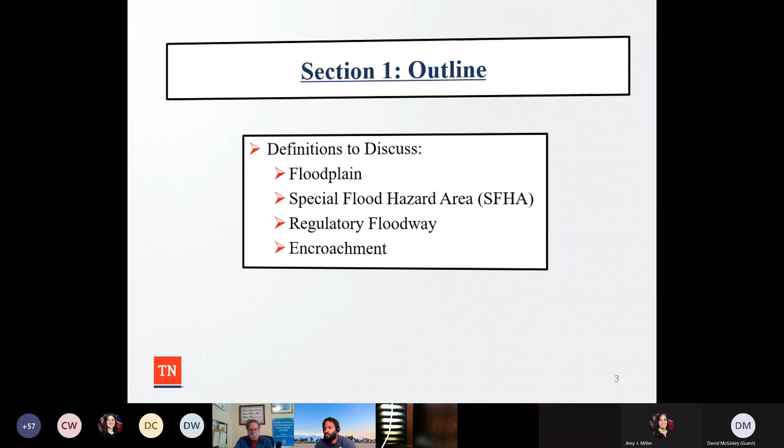Okay, National Flood Insurance Program definitions. Every program has the definitions for different terms. So the definition of development is the same in Tennessee as it would be in Texas, as it would be in California. So everybody's speaking the same language. So we're going to talk about floodplain, exactly how the National Flood Insurance Program, FEMA, defines what is a floodplain, what is a special flood hazard area. One time I did have someone ask me what was special about a special flood hazard area. Exactly how FEMA defines a regulatory floodway and encroachments. What types of development is going to trigger an engineering analysis. So we're going to go through these definitions here for section 1.

So the definition of floodplain is any land area that's susceptible to being inundated by water from any source. Some communities have topography issues where the low-lying areas are susceptible to flooding. Sometimes you have areas where there's a lot of subdivisions and there's stormwater when there's a rain event that can inundate land. Sometimes when there's folks that are purchasing a home in a subdivision, we like to call it the bottom of the cereal bowl, that they pick the lowest lot in the subdivision and water just naturally accumulates during a rain event.

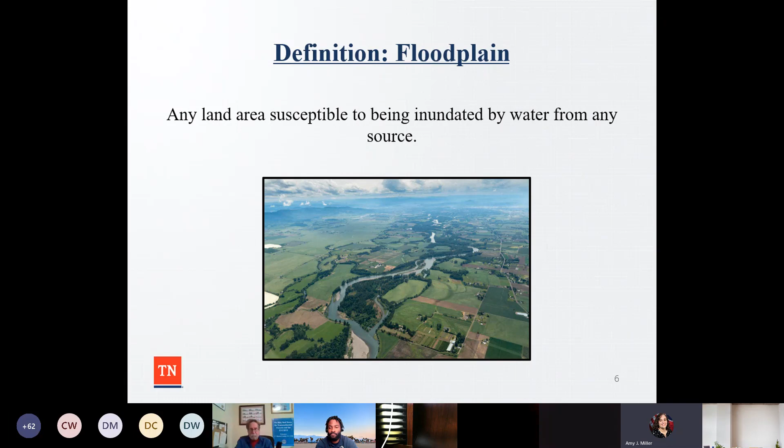So it's any land that's susceptible to being inundated by floodwater. So the definition for a special flood hazard area is the land in the floodplain within a community that's subject to a 1% or greater chance of flooding in any given year. So before, FEMA would always say, you know, you're in the 100-year flood event. So folks would say, okay, if I'm living in this area, I only have a once in a 100-year probability of having a flood event.

So FEMA has kind of migrated over to saying it's a 1% or greater chance of flooding in any given year. And so the area may be designated as Zone A on a flood hazard boundary map that was historical. And then as FEMA has detailed flood maps, they have various zones to include Zone A, where you don't have any detailed elevation information. You can have Zone AO that has shallow ponding, which is what, 1 to 3 feet or less, but doesn't have any base flood elevation information.

You can have Zone AH, where base flood elevations are on a flood insurance rate map. You can have Zone AE, like you see below in the map, or A99 that's protected from a levee. So those are kind of the special flood hazard areas that we see predominantly in Tennessee. So fun fact for the day, you can say that there's no coastal V zones in Tennessee.

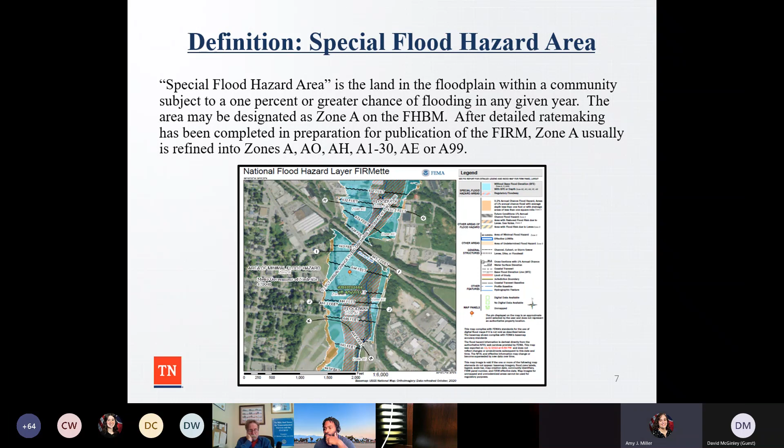If you have a stream in your community, the area along the stream really should be reserved so that if there is a flood event, that discharge of the base flood waters can go into the adjacent land area and flood without necessarily harming human life or having business interruptions. This is the highest potential for flooding, the highest risk in the community. So you really should have areas where it's free of any kind of encroachment, where floodwaters could damage a bridge, a structure, different things.

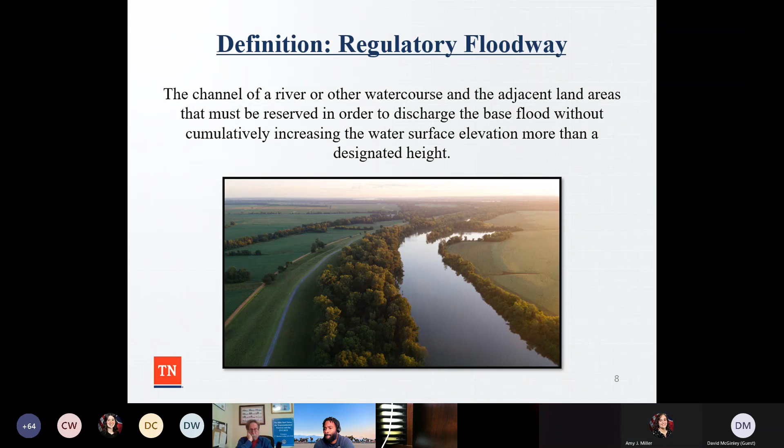So a lot of times, since I've been in this job, one of my favorite memories, one time I went to a community because there was a property owner that had a barber shop that did not like the fact that his barber shop was within a regulatory floodway. So went to a meeting. He was very upset. So let him speak. The newspaper reporter was there. There was a camera person, photographer.

And so he went outside of the barber shop and he said, I think the floodway line should stop right here. And he pointed to the ground, just arbitrarily pointed a spot and said, I think it should stop right here. Well, of course, his building was behind him, so it would have been out. So a lot of times you have people that say, I don't understand how flood insurance rate maps are developed. FEMA is just being, I want to say, aggressive in floodplain mapping. The federal government is wrong.

And so a lot of times there's homeowners that think that when flood insurance rate maps are developed, it's just arbitrary and capricious in how it is developed. But y'all could probably sit here for hours and say that there's a whole method to the madness when it comes to developing a special flood hazard area.

So one of the things is when a community is getting new flood insurance rate maps, or there's a new watershed study going out, one of the first things that the mapping contractor for the state of Tennessee is going to do is go out and have surveyors survey the area to see what captures a special flood hazard area. What is that low-lying area that's susceptible to the 1% chance of flooding? So as you can see here from the schematic, typically there's a stream channel.

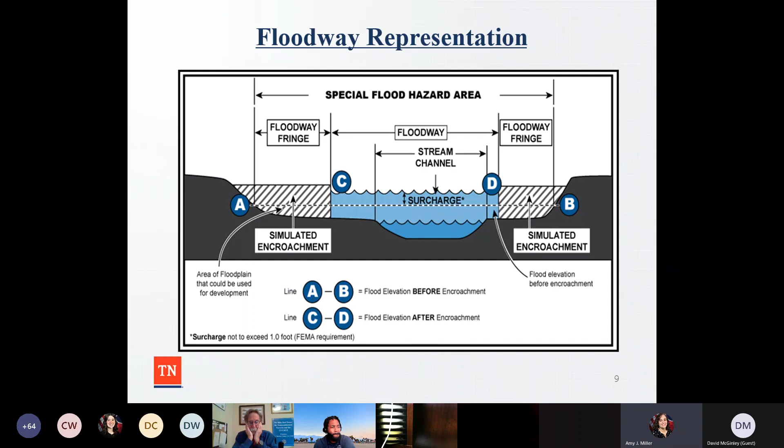So a lot of times people go, okay, Amy, a landowner is proposing to bring in fill, new construction, other development that's encroaching a stream. So it's any kind of activity or construction within the floodway. So a lot of times people think about fill. Let's say that I'm building a home and I'm putting fill on a lot, and let's say there's an unmapped stream, and my surveyor puts out stakes on the property to say, okay, you can't go beyond this line or else you're getting in a floodway.

So whether it's fill, new construction, a bridge, a structure, a pedestrian path, if it's a substantial improvement or other development, let's say that you're putting riprap along a stream bank, any of those type of activities are going to trigger an engineering analysis. So these activities are prohibited within an adopted regulatory floodway unless it's been demonstrated through hydrologic and hydraulic analysis that the proposed encroachment would not result in any increase in flood levels.

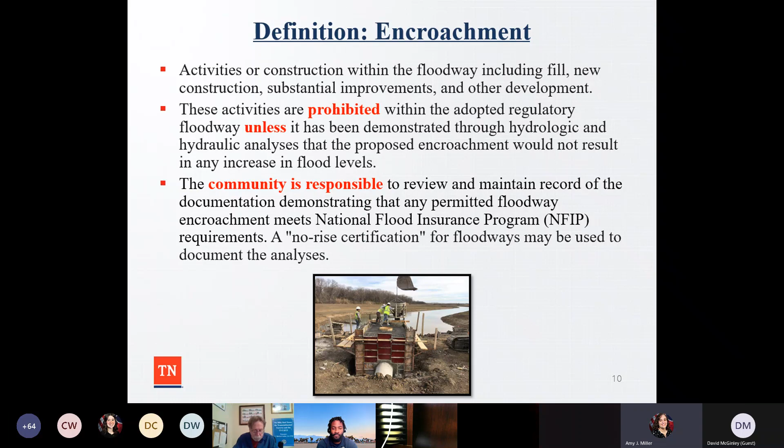So the National Flood Insurance Program, the Code of Federal Regulations has standards for stream encroachments, what triggers updating the flood insurance rate maps, a flood insurance study. And then there's other state and federal requirements that should be done when there's development that's impacting a stream. So we're going to go through that here right now. Some of the things we're going to talk about is we're going to highlight some of the regulations in the Code of Federal Regulations in parts 59, 60, 65, and 70.

We'll also talk about Executive Order 11988, that communities should sit down and look at a proposed development to see how it's going to impact the floodplain and if there's other alternatives to where the proposed development is going to be happening. We'll also go over the National Pollutant Discharge Elimination System permit. We'll also go through Section 404 of the Clean Water Act. We'll also go through Section 401 of the ARAP permit, the Aquatic Resource Alteration permit, and then we'll also talk about the regulations for encroachments of the various streams.

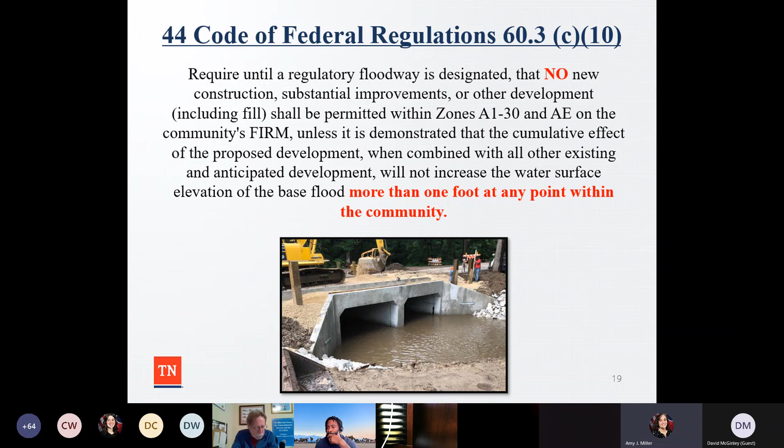So this is just additional information for Zone AE with floodway. This is very similar to what is within the flood damage prevention regulations, talking about prohibiting encroachments, fill, new construction, substantial improvements, other development within the adopted regulatory floodway. As I talked about a moment ago, there has to be an engineering analysis showing it is not going to increase flood levels within the community during the occurrence of the base discharge. And then if there are going to be increases, for number 2, they have to submit a conditional letter of map revision with a citation of 65.12.

Now, another one that's been fun, there's one floodplain administrator that has this issue where there's unmapped streams. So the state of Tennessee has higher regulatory standards for unmapped streams, that there has to be an engineering analysis done. It can have up to a 1 foot rise. But FEMA does allow communities to have the standard through 65.8 that a community or an individual through the community may request FEMA's comment on whether a proposed project, if built as proposed, would justify a map revision.

So sometimes we have landowners that say, hey, I have an unmapped stream. This is a higher regulatory standard. Why do I have to do this? So if you have a property owner that is developing within an unmapped stream, you want to make sure that you know the citation.

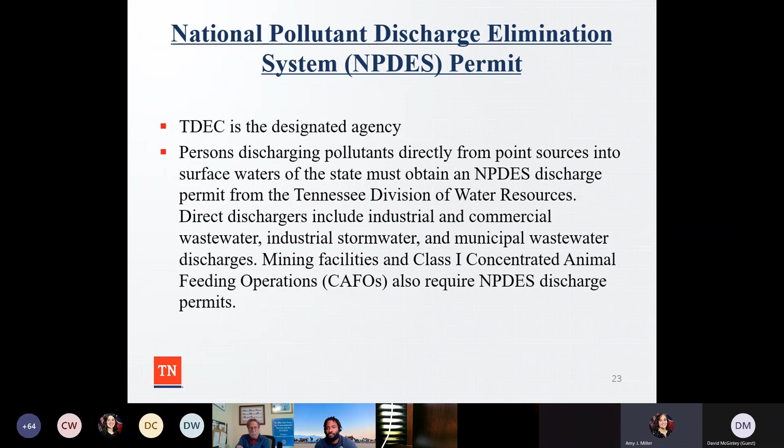So we also have Section 401 permits, which is the ARAP permit. It's the Aquatic Resource Alteration Permit. TDEC's Division of Water Resources is the designated agency. So persons who wish to make an alteration to a stream, river, lake, or wetland first have to obtain a water quality permit, and then any kind of physical alterations to the properties of waters of the state require the ARAP permit or a 401 water quality certification.

So if there's any kind of dredging, excavation, channel widening, or straightening, it has to get one of these permits. And we'll also talk in a moment about what the NFIP requirements are, especially when there's a stream alteration. If there's any kind of bank sloping, stabilization, channel relocation, water diversions or withdrawals, if there's a dam, a weir, a dike, a levee, or other similar structures, if there's any kind of flooding, excavating, draining, and/or filling of a wetland, if there's road and utility crossings or structural fill.

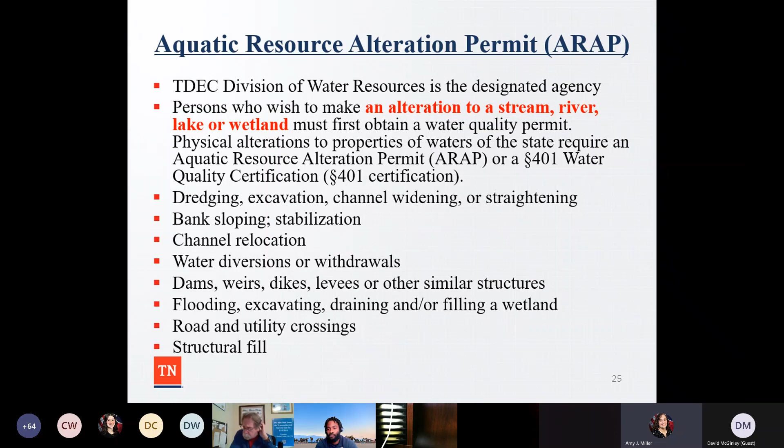Because if you look at the flood damage prevention regulations, it'll say, do you have state and federal permits? And when I come in and ask people that, they always go, yeah, but I don't always get the feeling that people know exactly what I'm talking about. So we want to make sure that you guys have more detailed information so that all the I's are dotted and T's are crossed. So again, stream alterations in the flood damage prevention regulations that every participating community has talks about making sure that all necessary permits have been received from those governmental agencies.

And then if there is going to be any kind of alteration or relocation of a water course, the affected communities need to be letting me know, as well as notifying adjacent communities prior to any kind of relocation, and then submitting that notification to FEMA. And then within 6 months of project completion of the altered or relocated water course, that documentation has to be submitted to FEMA through a letter of map revision process. This is one thing that we statewide have not done a good job on; there have been various types of projects where there has been an alteration or relocation that has not been submitted to FEMA as a letter of map revision.

So we want to start being a little bit more diligent, because if you're a homeowner and the stream is being relocated, if the maps aren't getting revised, homeowners are still going to be required to pay for flood insurance because the maps don't accurately reflect on-the-ground conditions. And then if it's relocated to an area where a homeowner should be having flood insurance to protect their business or home, those maps should be revised. And then also making sure that the flood carrying capacity within an altered or relocated portion of any water course is maintained.

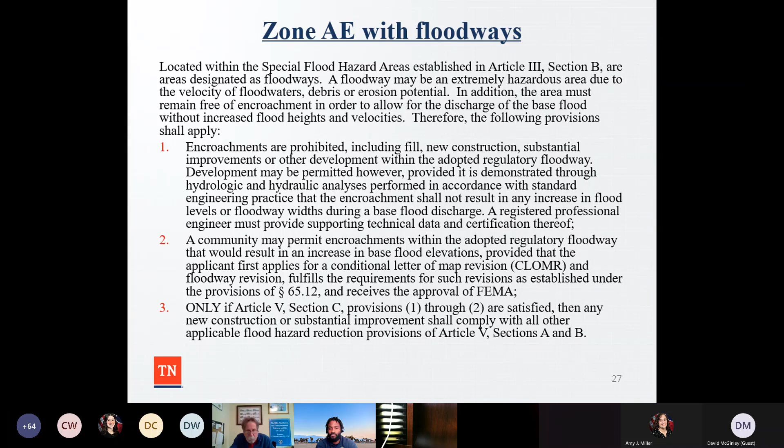For Zone AE without floodways, until a regulatory floodway is designated, no new construction, substantial or other development, including fill, shall be permitted within Zone AE on the community's FIRM unless it's been demonstrated through hydrologic and hydraulic analysis performed that the cumulative effect of the proposed development, when you combine all other existing and anticipated development, shall not increase the water surface elevation of the base flood more than 1 foot at any point within the community.

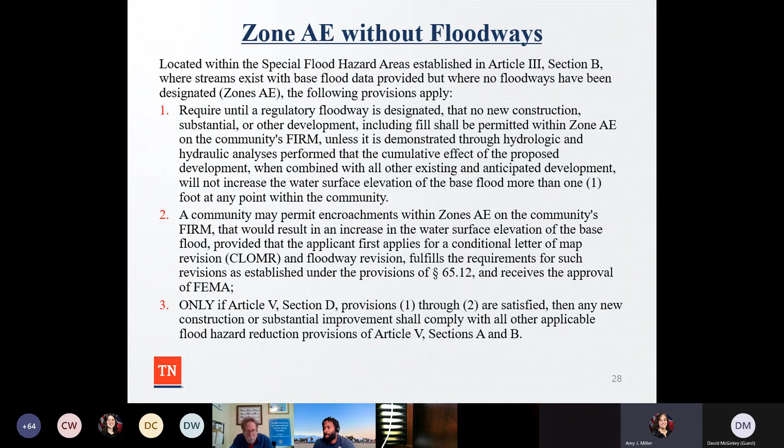So the community can permit the encroachment if it's within that standard. And if it does result in an increase in the water surface elevation of the base flood, provided the applicant first applies for a conditional letter of map revision and floodway revision to fulfill 65.12. So we do ask for that because then you can revise the maps to show the accurate and up-to-date flood risk in a community.

For Zone A streams, this one is a little bit harder for some people because if you have a Zone A stream, there's no base flood elevation information established. So the applicant is going to have to hire a surveyor, and one of the first things the surveyor is going to have to do is measure the width of the stream from top of stream bank, right? So if someone is proposing something in a Zone A stream, but they're outside an area equal to the width of the stream or 20 feet, whichever is greater, measured from the top of the stream bank, they don't have to do an engineering analysis.

However, if they're within that buffer area that's equal to the width of the stream or 20 feet, so if they're building a bridge that's crossing a Zone A stream that's within that buffer, they're going to have to hire a registered professional engineer to provide engineering analysis that the cumulative effect of the proposed development combined with all other existing and anticipated development will not increase the water surface elevation of the base flood more than 1 foot within the community.

So that's one thing, when you start to get into some of these other streams, there's not a HEC-RAS model. So the HEC-RAS model is really that representation we saw earlier of how FEMA captures floodways and floodplain in a community, and has a detailed analysis. So if there's streams like Zone AE without a floodway and there's no FEMA model, and Zone A streams do not have a FEMA model, there's more things that a property owner is going to have to do to try to get an engineering analysis to evaluate the base flood discharge, the floodway widths, and the base flood elevation. And they're going to have to hire a surveyor to delineate where that regulatory floodway would be along that stream.

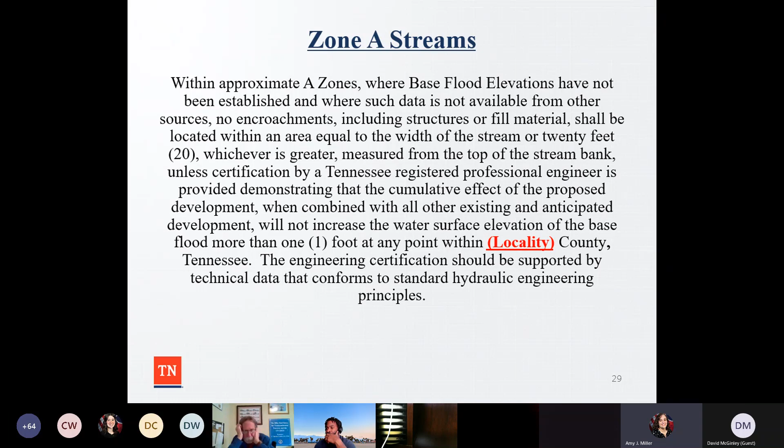If they're doing something outside that buffer, they have to give you as a floodplain administrator a site plan showing that development is outside that stream buffer. Again, I don't think that's hard to ask for. I don't think that's asking a lot. For some people, it seems to be. But again, if you're a floodplain administrator and you're trying to make a determination and make sure that development is compliant, you want to make sure that you have that documentation on the site plan and that it's very clear what the buffer is and if that proposed development is outside of it or inside of it. You have to have that on the site plan.

So unmapped streams, same sort of thing, you're going to have to hire a surveyor to go out and have a site plan to show where the channel of the stream is to determine where that floodway area is, where the water is going. And then an engineer is going to have to create an effective model. So again, you're going to have a baseline as far as the different flood events, the 10, 50, 100, 500 year events. Then they're going to do an existing conditions model to show what's existing within the area and tie that into a detailed study, as well as the proposed conditions, what is being proposed at the site, looking at all that to see if you have up to a 1 foot increase of the water surface elevation at any point within the community.

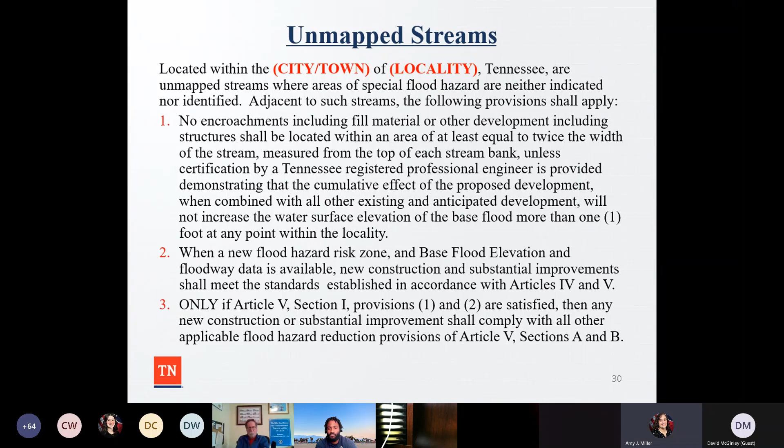Again, if you're able to meet that threshold, there is a concurrence letter that can be written by me after Young reviews everything. So again, this is a higher standard. There's only a couple states in the nation that have this standard, but it is something that's in the model flood damage prevention regulations. It's been in there since at least 2009. So this isn't something new. This isn't something that I came up with, Young came up with, or Julius came up with. It's something that we've had from the beginning in Tennessee. So this is just kind of a nice schematic.

Carrie Williamson at TVA one time sent us a picture drawn out talking about the stream being 10 feet wide. What does this look like to have the buffers? So the stream needs to have a 50-foot buffer. You're going to have the 10-foot width where the stream channel is, where the water flows, and then twice the width of the buffer on each side, which would be 20 feet.

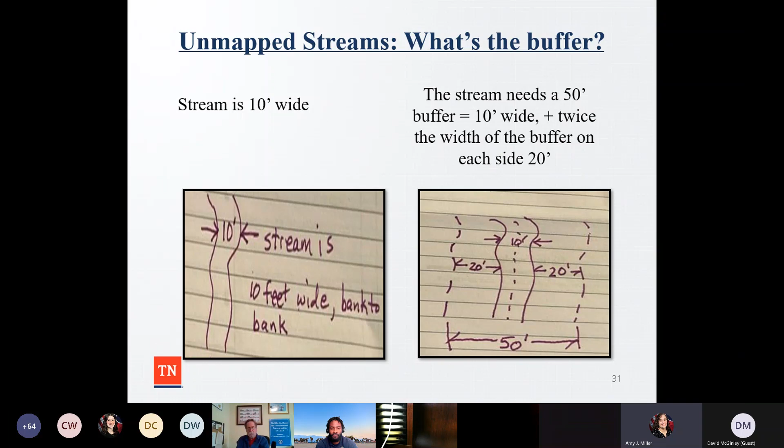So sometimes when you talk about these standards, people are visual learners. Some people can read the text and understand it, and some people have to see it. So we kind of have the best of both worlds: if you're wondering what this looks like, this is a good schematic for that.

Okay. So we're almost halfway through the presentation, so we will continue on with local responsibilities. As we always say during these webinars, the star of the show for floodplain management is the local official. It is not me. It is not Julius. It's not Cheyenne. It's you guys. So whenever someone comes in proposing development, there are certain things that you, as a floodplain administrator, should be doing.

As we've talked about over and over again, the first thing is having a floodplain permit, documenting any kind of man-made change to improved or unimproved real estate, and then having a site plan. In your flood damage prevention regulations, you are required to have a site plan drawn in duplicate to scale, showing the nature, location, dimensions, elevations of the area in question, existing or proposed structures, placement of earth and fill, storage of material and equipment, and drainage facilities.

One thing that I think needs to be done a little bit better statewide is that if someone's giving you a site plan, don't just take it as gospel. They really should be putting the National Flood Hazard Layer on the site plan. We had a meeting yesterday with a community about a tree planting project within a regulatory floodway; the site plan didn't show that, but the National Flood Hazard Layer did. So if a surveyor just arbitrarily draws a little dotted line to say this is a floodplain, please verify.

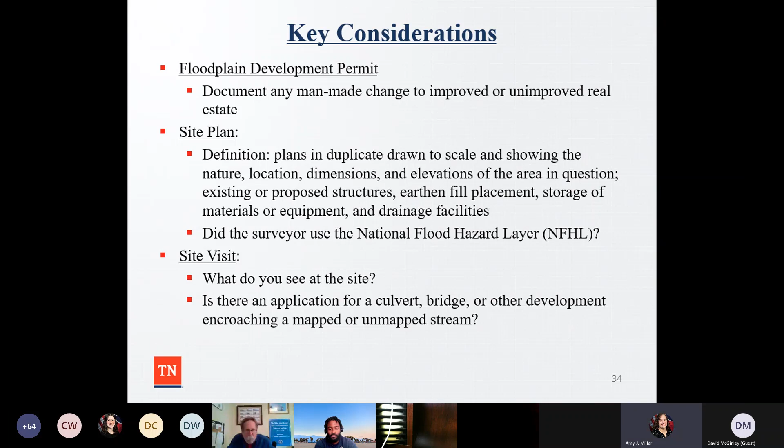Sometimes people say to me, Amy, I get these site plans, I'm super busy, I don't have time to go out and look at the site. It's very detrimental. You really should be going out and walking the site, whether it be you, a building inspector, or a planner; somebody should be going out to see if there's a drainage facility. Another red flag is if the development proposal has a culvert or any kind of stream crossing; that tells you there should be an engineering analysis. So you want to look at what's happening documentation-wise, as well as going out and looking at the site.

So there are various types of stream encroachments. These are some of the different types of projects we've seen through the years: fill, new construction, substantial improvements, bridges, culverts. I put fill on there twice. Woo! Excavation, alteration, relocation of a stream, water and sewer lines. One of our favorites a couple years ago, I'm sure y'all will giggle, was an amusement park ride that was encroaching in a floodway, or riprap of a stream.

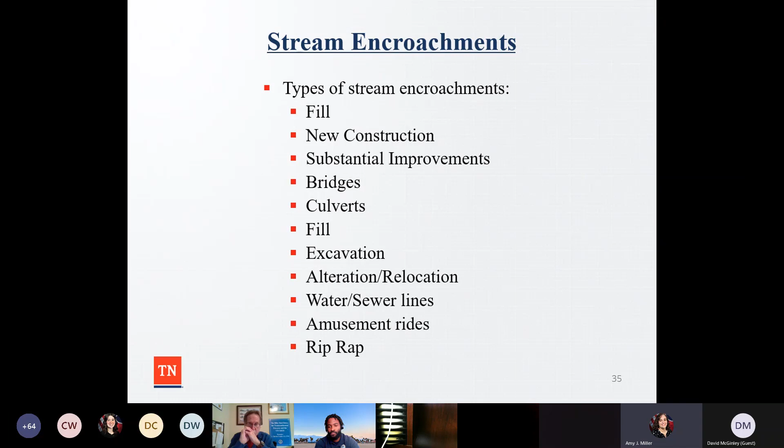One of the great things about Tennessee and floodplain management is we have a lot of documentation. When I first came into this job, there wasn't really a lot of how-to guides to help floodplain administrators. So over time, we have developed a lot of materials and resources for you guys to equip you to help you do your job a little bit better.

So the Tennessee No-Rise Guidance Document gives an overview of the National Flood Insurance Program standards. Page 2 has the submittal guidelines. After page 2, there's discussions about the 5 different hydraulic models. What do they mean? Documentation requirements, additional considerations, what triggers an engineering analysis versus what does not if it's a small scale project. And then we also have the ordinance requirements.

So we went through several slides back about Zone AE with floodways, Zone AE without floodways, Zone A streams, and unmapped streams. So we literally have copy and pasted the ordinance text to help y'all. So if somebody is proposing to do development along a stream, if you've never ever read that text or you're unfamiliar where it's at within your regulations, we have it in here. We've done the work for you.

Again, everybody needs to read this prior to initiating a study because it kind of gives you all the pieces and parts to it. We're going to go through some of it today. You guys will see a little bit of my humor. You'll see Young's top 10 list of issues, but we're going to kind of go through some of the things. We're not going to get into everything because then the webinar would be several hours long and y'all would not be happy.

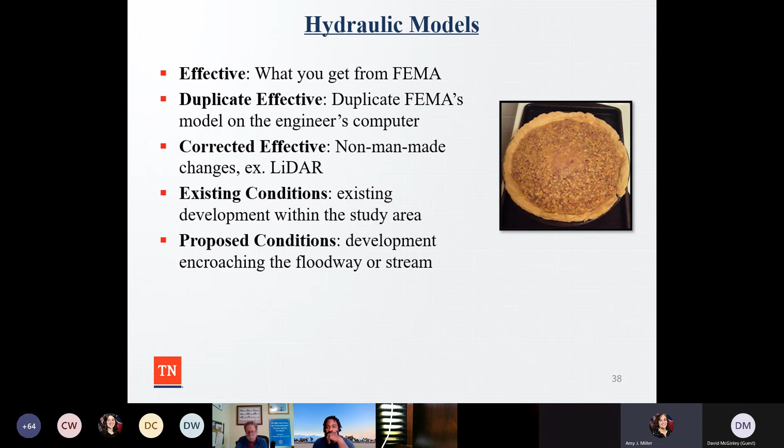So one of the key points when you're doing an engineering analysis, or when an engineer is submitting a report to you, is to have a project narrative. You want to know the who, what, where, when, why. So if anybody were to ever pick up the engineering report, someone should be able to open it up and say that I'm in Wayne County, Tennessee. I'm on, let's say, Burbank Road. I'm proposing a bridge crossing on, let's say, parcel 4, lot 25 or whatever, and it's going across Killbuck Creek. So someone should be able to pick it up and understand what you're proposing to do.

Let's say I'm just doing a steel bridge across there, and different things and the abutments and all that. But somebody should be able to pick up that project narrative and understand where you're proposing the development, what you're doing, and what type of stream it is. So making sure that you have the flood insurance rate map and all that information is important.

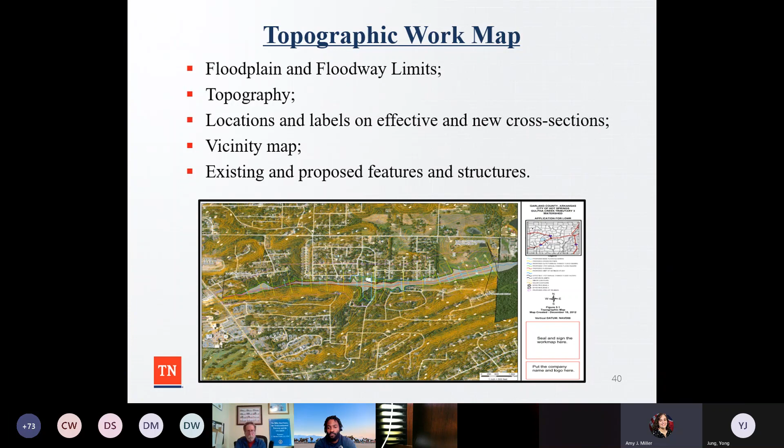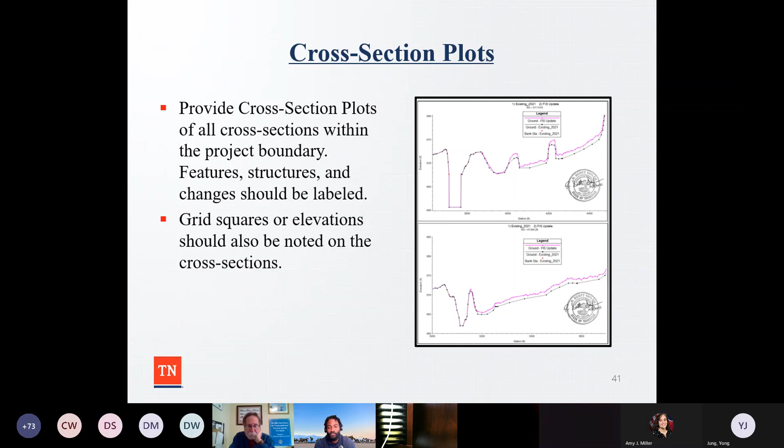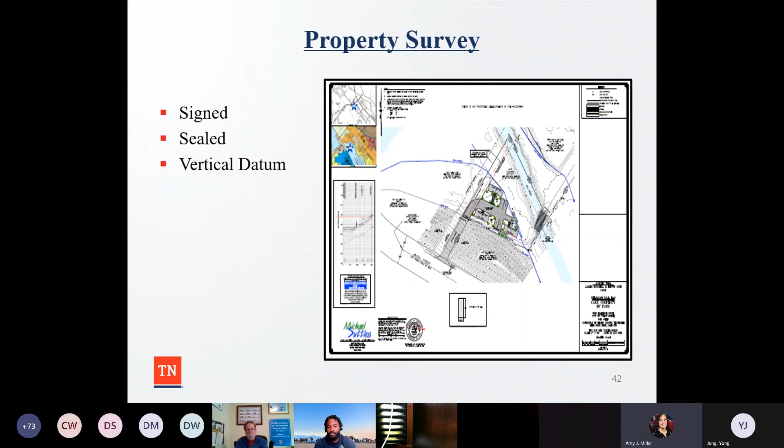Property survey is one of my favorite songs. It should be signed, sealed, delivered with the vertical datum. Again, stuff should be signed and sealed. A lot of times when we see property surveys, there's no vertical datum on them. So when we get this information, we sit down and look at it and go, hey, it's missing this, missing that. So again, it should be signed and sealed.

So I think what's important about this is a lot of times we get a lot of arguments: there are increases for the base flood elevations, there are increases for the floodway elevations, there's an impact with the floodway widths. But a lot of times the engineers just sign this to say that there's no rise or no changes, but actually when they're signing the certification document, it's saying that there's no increase in the base flood elevation, floodway elevations, or floodway widths at published or unpublished cross sections in the flood insurance study for the community.

So again, that's kind of important to see that that can be an issue sometimes. So again, like when we sit down and look at all this stuff, we had someone a couple weeks ago that signed a no rise certification, or the community official signed a no rise certification, but the engineer said that it was in the floodplain.

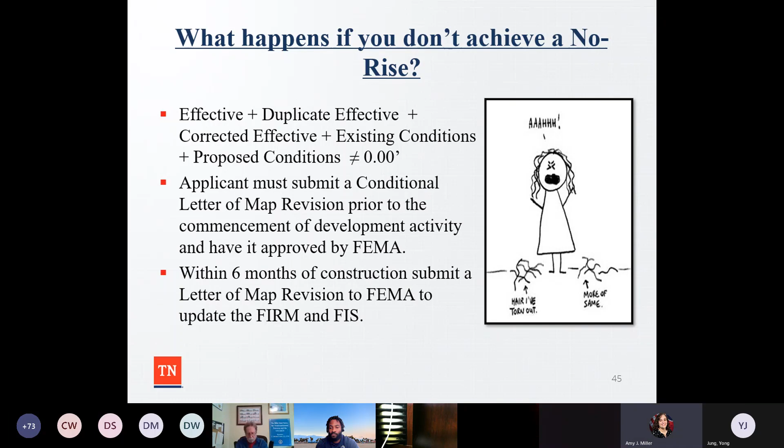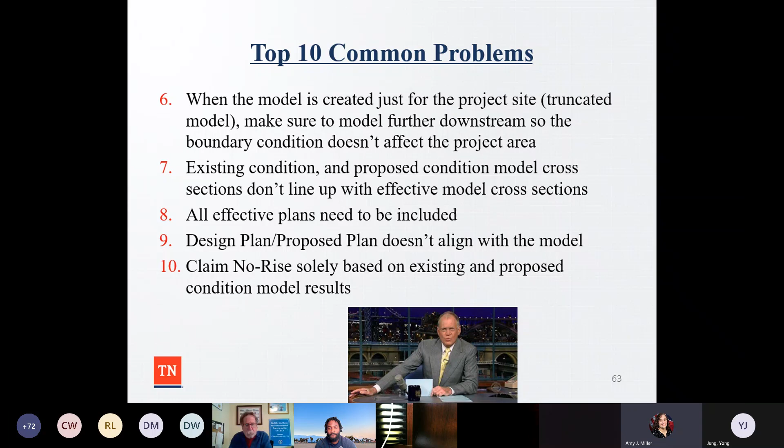So sometimes I'm sure some of you guys wonder, well, why is Amy doing this? Why is this so important? Our number one violation that we have in Tennessee is that we have different kinds of stream encroachments going on where there's not an engineering analysis being done.

And so if a community signs off, let's say, on a letter of map revision based upon fill to FEMA, and there's fill that's within the floodway, if I'm the mayor, I'm probably going to ask you, why did you sign off on this? If we have a call about a potential violation, we're going to ask you, did you have a site plan? Was a floodplain, floodway delineated on the map? What do you have for documentation?